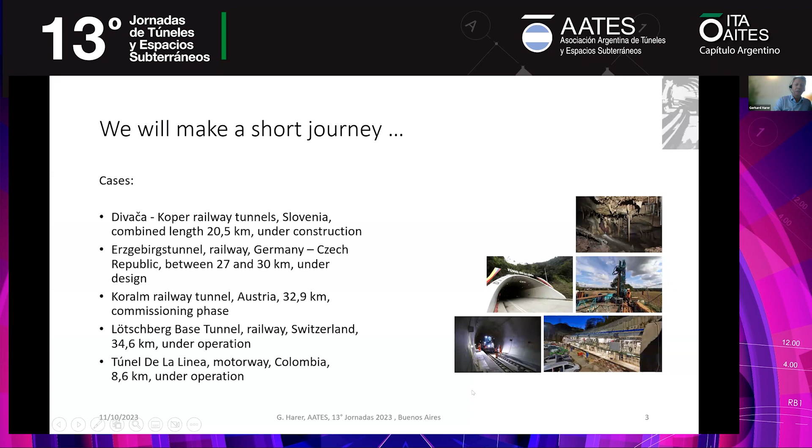Also, we will look at the colleagues in Switzerland, at the Lötschberg tunnel, a big tunnel with almost 35 kilometers in length. And at least I found one nice example from your continent, from the colleagues in Colombia, the Túnel de la Línea, with almost 9 kilometers in length. So with this, I will give you some examples of what I meant.

So what is the importance of investigation in these projects, in the development of the projects, and what is the role for us engineering geologists or geotechnical engineers? We have the responsibility to assess the ground conditions, and that's very essential, to provide material properties representing the conditions as natural as possible.

Of course, all these projects are fraught with some uncertainties, with some unsteadiness. You all know examples. It's because of political reasons, problems in design, different interpretation of facts, unsteadiness in financing, and so on, which can cause interruptions, delays, which extend the process of the development of the project, which also lead to changes in the project.

And usually we also have to consider that the larger the projects become, which normally is the case with huge base tunnels, the greater the uncertainties become. This we as geologists, engineering geologists, geotechnical engineers have to deal with in our approach to proper site investigation. Another very important aspect is the consideration of risk.

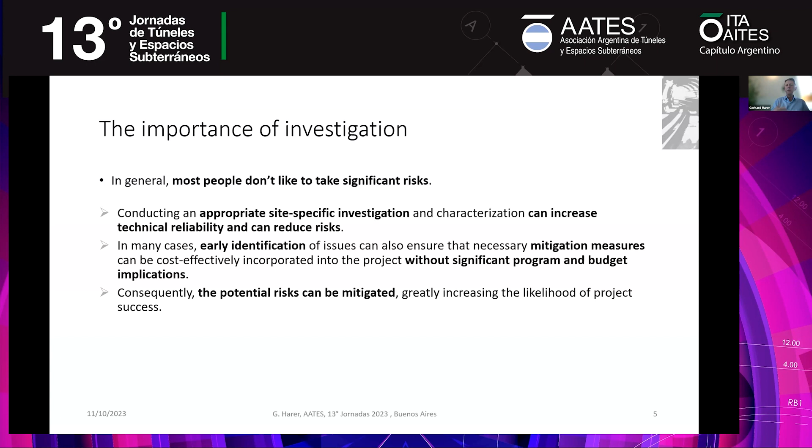The earlier we talk about these measures, the less their influence on the program and the budget of the project. And consequently, the potential risks can be mitigated, they have to be mitigated. And of course, if we mitigate the risk, this greatly increases the likelihood of our project's success.

What is the basis? And that's really my deep personal opinion. The basis for any proper site investigation is the development of an engineering geological model. Of course, in early phases, very coarse, very raw, and then step by step getting finer, having more results, having more data. But anyway, we have to form an engineering geological model, and all our investigation data shall be merged in this model.

And this model, of course, shall include all project relevant properties. So not all properties, but all project relevant properties of the soil and the rock and the groundwater. Of course, the micro and the macro structure, the dimension and the orientation of stresses, in particular in case of deep-lying tunnels, and the distribution of these properties in the project-relevant environment.

If we have a geological and engineering geological model, this enables us to have a three-dimensional understanding, which is important in particular in complex situations. And these models also allow us to communicate these complex informations to other stakeholders of the project. As I said before, these models are not static. They must be continuously evaluated and updated throughout the entire course of the project, from the early phases of design to the end of construction.

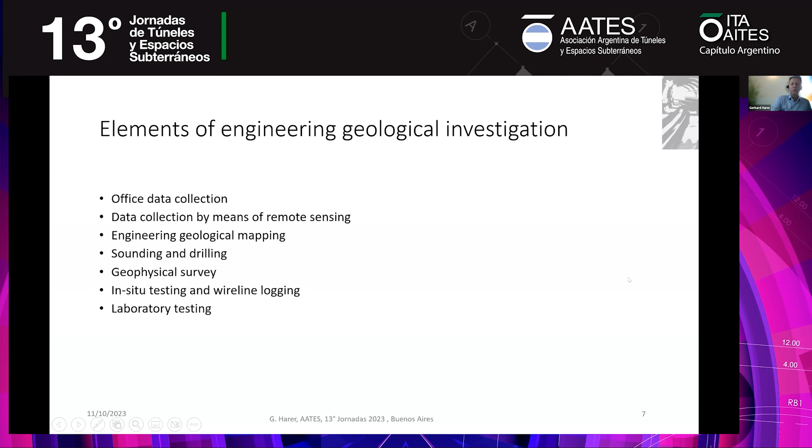We should not forget engineering geological mapping. I will talk a bit later about all these possibilities provided from sounding and drilling in combination with geophysical survey, also in combination with in situ testing and wireline logging, and of course also the testing of our samples in the laboratory. So our advantage is we have a comprehensively filled toolbox. This is available for us, and these tools shall be used for site investigation.

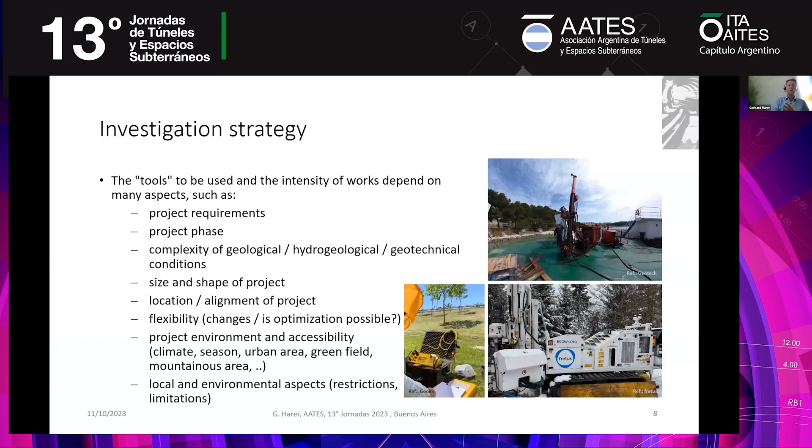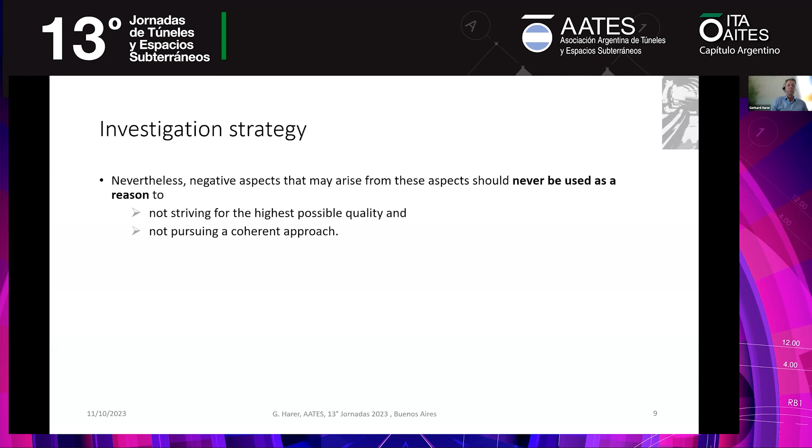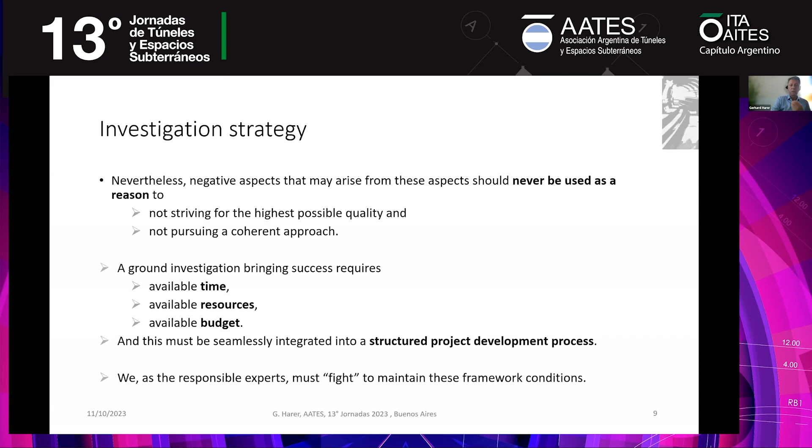So there are a lot of aspects which shall be considered, which can influence our investigation and our decision of tools. But finally, all these negative effects should never be used as a reason for not striving for the highest possible quality and not pursuing a coherent approach. This is our responsibility as engineering geologists and geotechnical engineers. But what we need for this is time, resources, and budgets. And all these must be seamlessly integrated in a structured project development process. And we, as the geologists, as the engineers, have to fight to gain this. It's our responsibility.

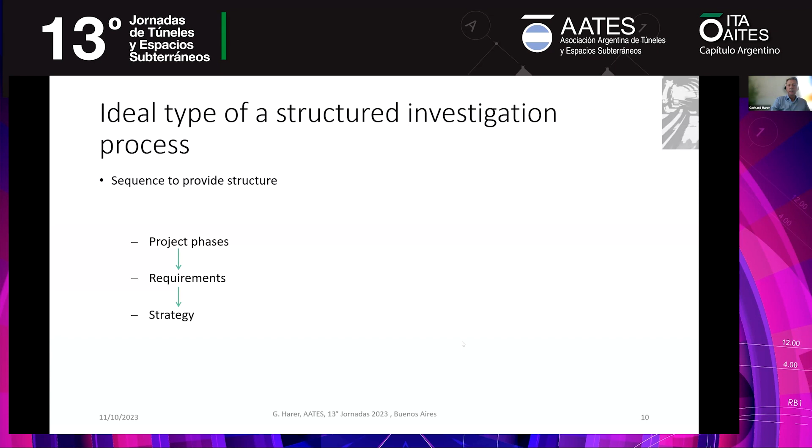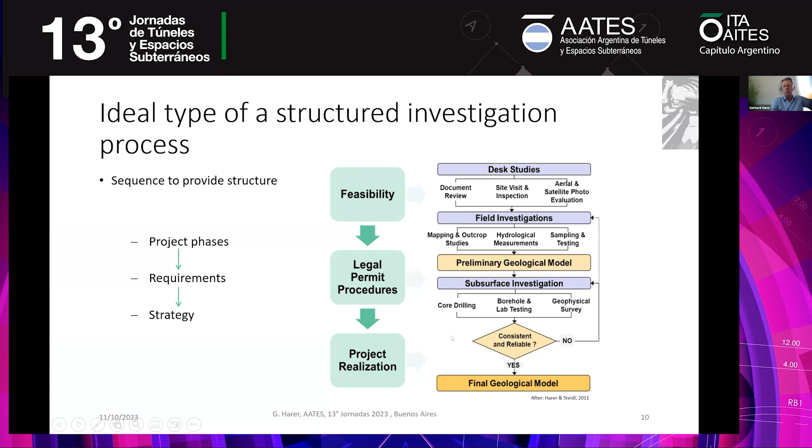Only on the basis of this model should you make the first steps for subsurface investigation. You should not drill, you should not do any subsurface investigation without having at least a general idea about the three-dimensional conditions of the ground to be investigated. And of course, by making this subsurface investigation, you get more information and you see whether your geological model is reliable or not. If not, you have to go again through this loop and reconsider it. And this can go on in several loops from project phase to project phase, from coarse to fine. And I will give you some examples about this.

One example is from my former projects, the Koralm Tunnel in Austria. We had pretty good success due to a structured investigation process. I'll give you some more data on the tunnel. It is an almost 33 kilometer long base tunnel in the south of Austria. At the portal sections, we have Neogene, geologically young sediments, and in the base, as you see in the right upper picture, we have very nice crystalline rock mass, but cut by huge fault zones and also covered with a deep-reaching weathering cover.

The overburden reached up to almost 1,200 meters, and we started with the first steps of investigation, data collection, aerial pictures and so on in 1998. And the opening of the project will be in 2025. So we are talking about a period of 25 or more years.

And if you do not have a structured approach to your investigation over this whole period, you will lose a lot of data. You will not really find this red line. So this structure of an investigation for this long-term project is really important and mandatory. So the site investigation for the Koralm Tunnel was composed, as I said, of satellite and aerial data interpretation, and of course also gathering all the office data.

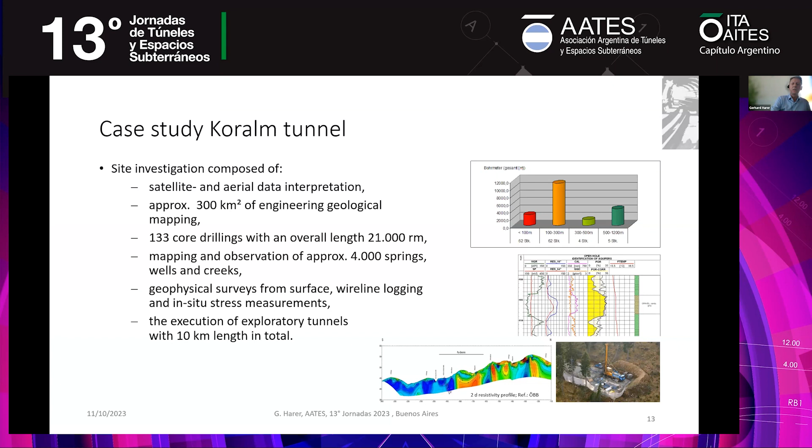We did wireline logging. We made in situ stress measurements. And because of this specific situation with these young sediments at the portals, we also carried out a system of investigation or exploratory tunnels from both portals. Carried out over a period of some 15 to almost 20 years during construction, but the project phase was more than 25 years.

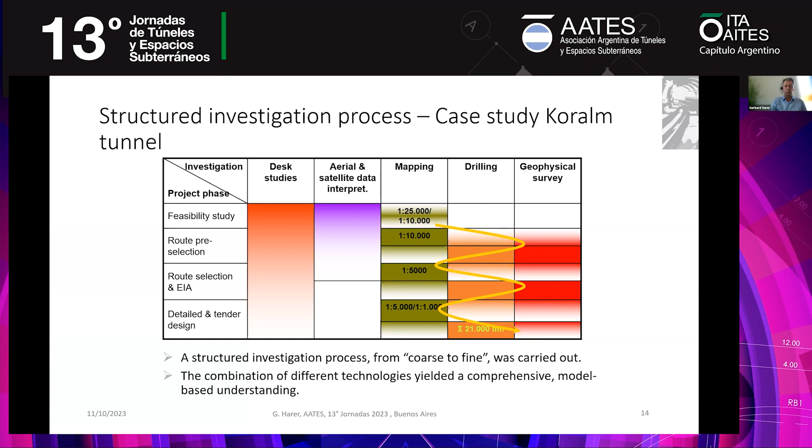So in this way, starting from a very rough approach in early phases to a stepwise detailed process, the more advanced the project is. So this structured investigation process, as I said at the beginning, was carried out with big success, always with the target from coarse to fine, and gained us really good success for this project.

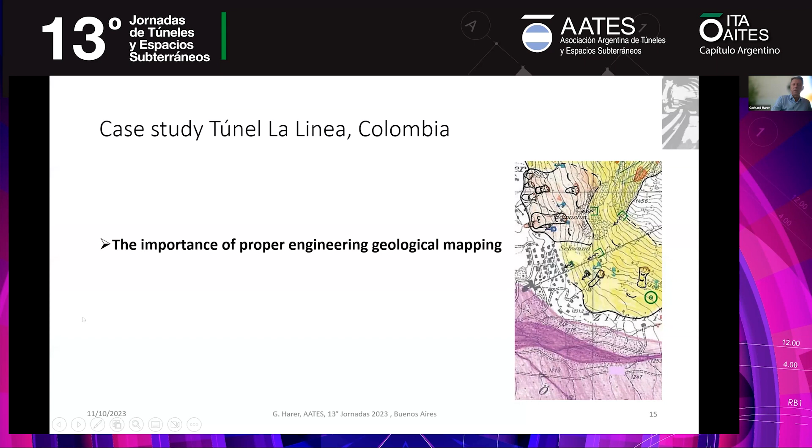One aspect where from time to time I see some deficits in the approach is the performance of engineering geological mapping. From my point of view, it's very important, and I do not know why it's not generally carried out in a really proper way. But what we should consider is that, of course, what to show on an engineering geological map depends largely on the project-specific requirements. So it differs a bit from this academic, pure geological way of mapping, what I called the conventional geological map.

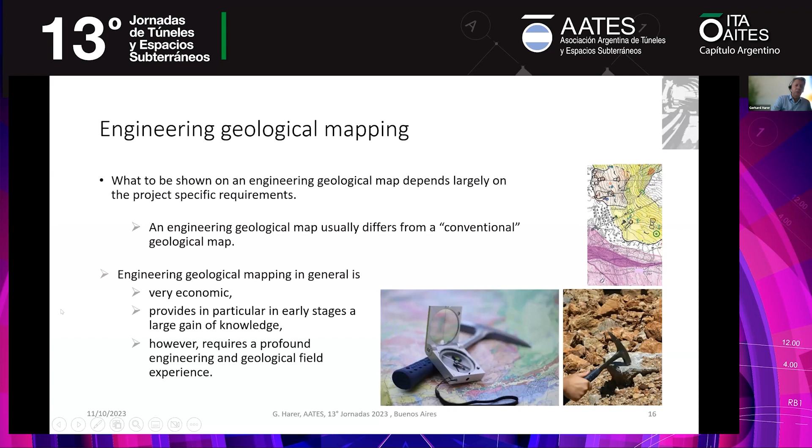What we should really find during this mapping are aspects which really have importance for our project. From my point of view, engineering geological mapping is very economic. It costs not much. It provides, in particular in early stages, a large gain of knowledge, but of course, it requires profound engineering and geological field experience. So you should work with really experienced consultants. But if you have these resources, at the end you will really win by this approach.

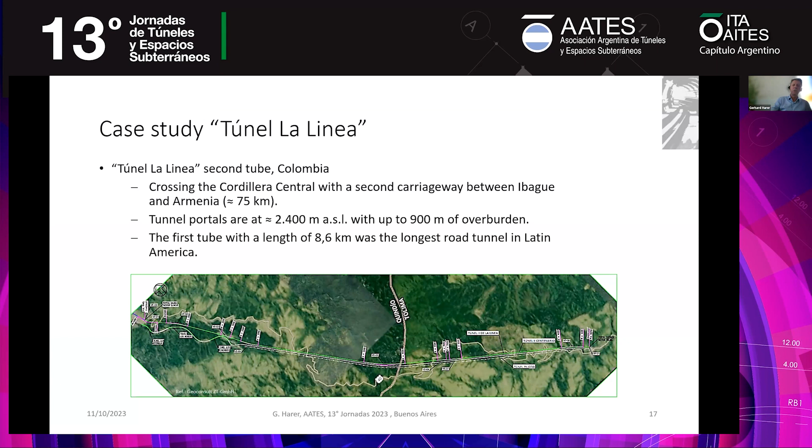Let us look from Buenos Aires a bit to the north to Colombia. I had the possibility also to join the Túnel de la Línea project. Probably most of you know this. With the first tube, it was the longest tunnel in Latin America, with almost 9 kilometers in length. The tunnel portals are at an altitude of roughly 2,400 meters above sea level, with an overburden of up to 900 meters. And the tunnel crosses the Cordillera Central. And the question was to construct a second tube, parallel to the first, for this motorway between Ibagué and Armenia.

The history of this project was not very successful, to be honest. For the second tube, several drillings were carried out by several consultants, also international ones. And you must consider the first tube was already existing. So there should have been mapping data from the first tube, but anyway, additional programs were carried out. In parallel, it was decided in 2004 to drill an exploratory tunnel parallel to the tube.

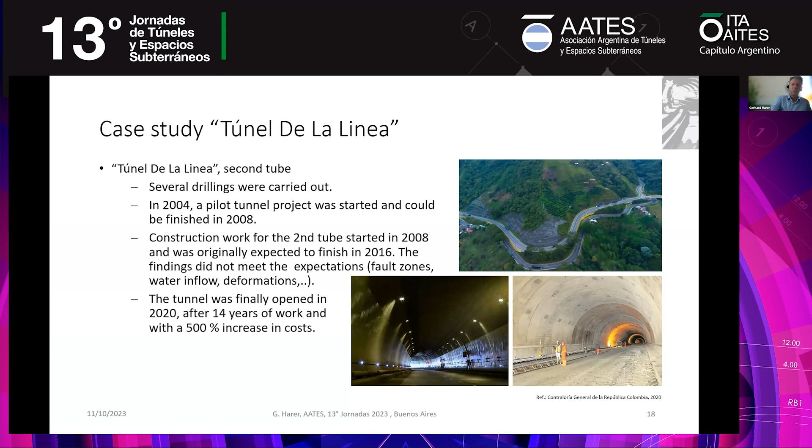The construction works started in 2004 and ended in 2008. With the findings of this, the client decided to start with the second tube in 2008, which was expected to be finished in 2016. During the excavation of the second tunnel, the findings did not meet the expectations. There were different fault zones, high water inflow, deformations, and the people on site could not explain why the situation was different from the expectations. Finally, after 14 years of work and with a 500% increase in costs, which means 5 times more, the second tube went into operation.

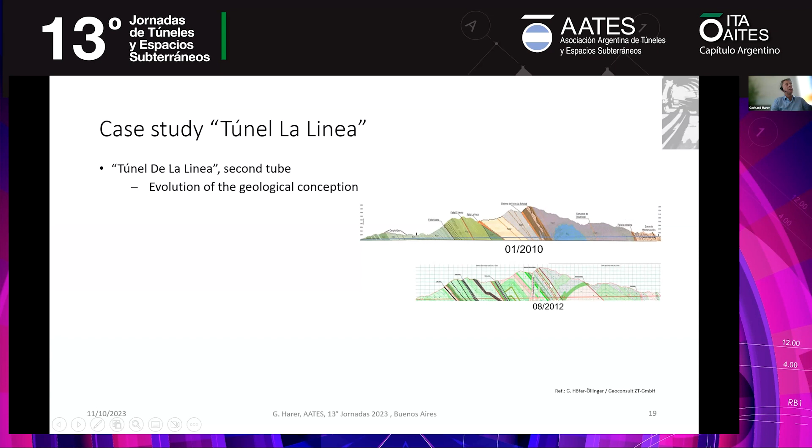You see, based on these data, on the non-existing data from the first tube, and without really sound mapping data, a longitudinal section was developed. You see, some 2 years later, same profile, same tunnel, the geological conditions looked pretty different. And some time later, they also looked pretty different.

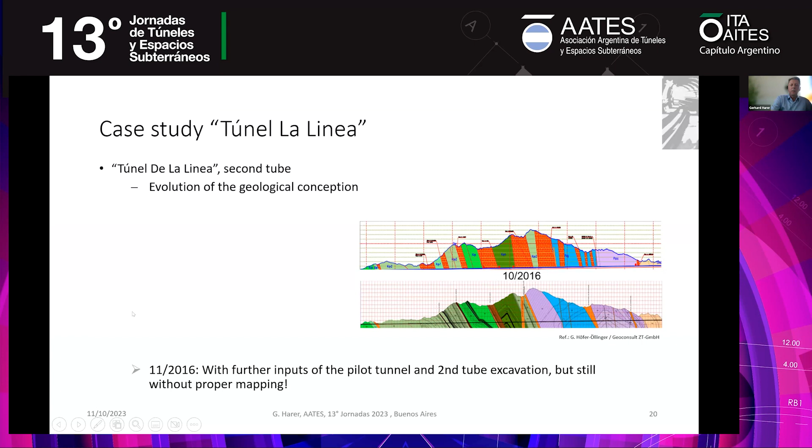5, 6 years later, it was simplified, but also a completely different picture, and so on. So also having these data from the pilot tunnel, having the data from the first tunnel, it was not possible for the colleagues really to prepare a sound and reliable longitudinal profile for this tunnel. So what we found out is that all these considerations were based on one surface mapping, which was carried out some 15 or 20 years ahead.

And we decided to go out, and within a few weeks we made a rough mapping. And you see also from this picture, the tectonic, the kinematic conditions from the existing idea and from our idea look completely different. And by having this data from surface in combination with the data from the pilot tunnel, here it's shown a bit better on the plan. So on the first, I showed you our mapping data. So it was possible really to develop a reliable longitudinal section. Then based on this, finally the construction of the tunnel could be finished on this reliable data.

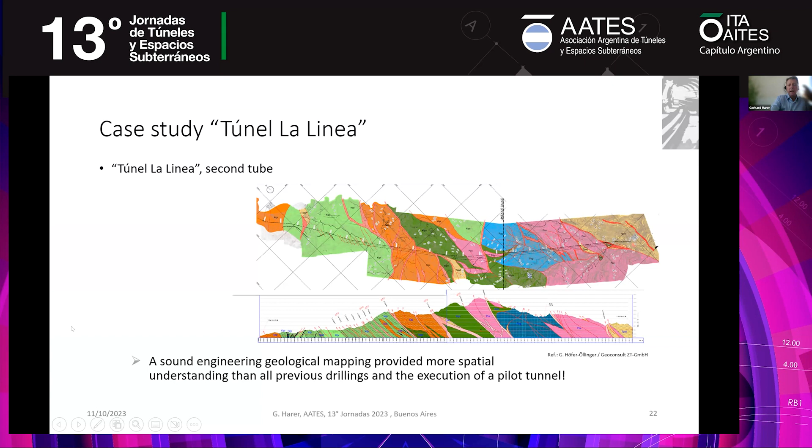So that means without having a sound geological idea also on surface, all these drillings and even the data from an investigation tunnel don't really help you to form a realistic picture of your geological conditions. What we should not forget and what we have to look for is really, if we apply subsurface investigation, we have to ask for state-of-the-art techniques and for high quality.

Here are some pictures again from the Koralm tunnel. I also told you in total we carried out around 21,000 running meters of core drillings with really impressive quality, with a core loss less than 5%, less than 3%. We continuously drilled with core diameters larger than 100 millimeters, even in depths to 1,100, 1,200 meters. The orientation of the drilling was no question, so we drilled in each and every direction: vertically, horizontal, upwards, deviated. So all these techniques are available and there are no limits.

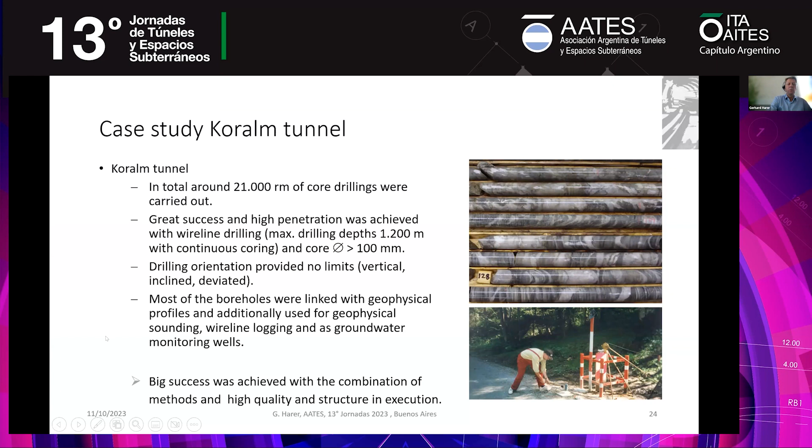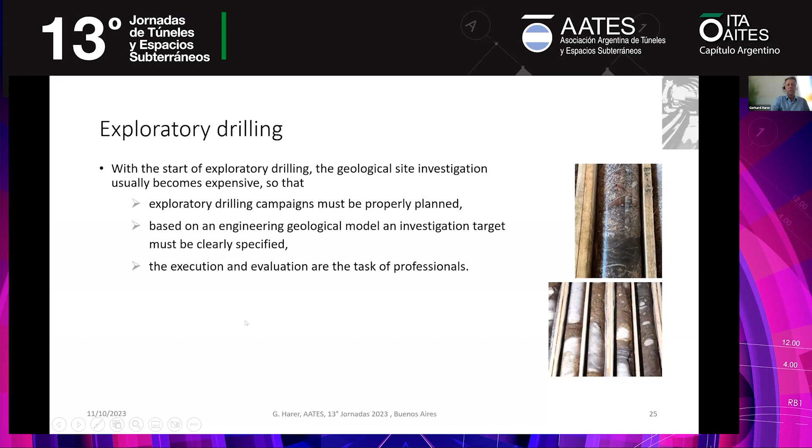And of course, most of the boreholes were then linked with geophysical profiles. And in almost all the boreholes, we made some observation wells. We did geophysical sounding, wireline logging, and so on. So that means our drill holes were used in a multi-purpose way. So with this approach, we had really good success for this Koralm tunnel. So to sum up, exploratory drilling campaigns must be properly planned, must be based on a geological engineering model with a clear investigation target for each drilling, and the execution, similar to engineering site investigation, is a task of professionals.

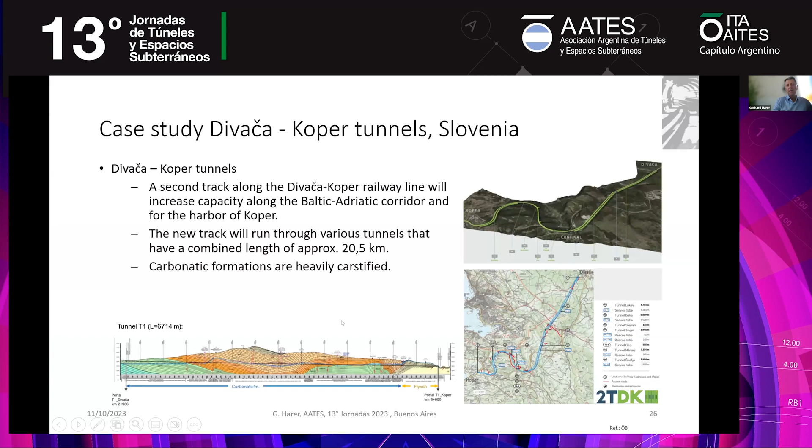I give you a very actual, very nice example now from Divača Koper in Slovenia. They have very difficult situations crossing a karstic environment. So it is a series of tunnels going here to the harbor of Koper with more than 20 kilometers of tunnel length in total, heavily karstified, and of course it's risky. And so the colleagues there developed a very nice approach of risk mitigation, of risk reduction in these conditions where karstic features are not regularly possible to predict.

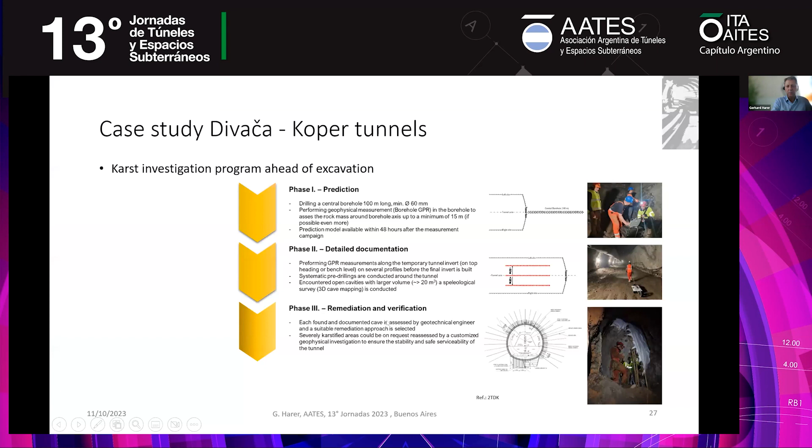So their first phase is to drill ahead of the excavation, really to see, is there a karstic feature, is there a cavity which can be dangerous or risky for the excavation. If they overcome this part, then they make a detailed documentation with ground penetrating radar, also to see for the final structure, are there any negative karstic features, any cavities around the tunnel, which probably later on can negatively influence the operation. And then in case they found something, also outside the tunnel, they do some measures to fill, for instance, these karstic cavities with concrete or whatever.

So a very nice example here you see from this first step. There were some indications there could be a cavity, and then after crossing this situation, they made this ground penetrating radar, and they see, okay, 4 meters below the tunnel floor there's a big cavity, which then, of course, was grouted.

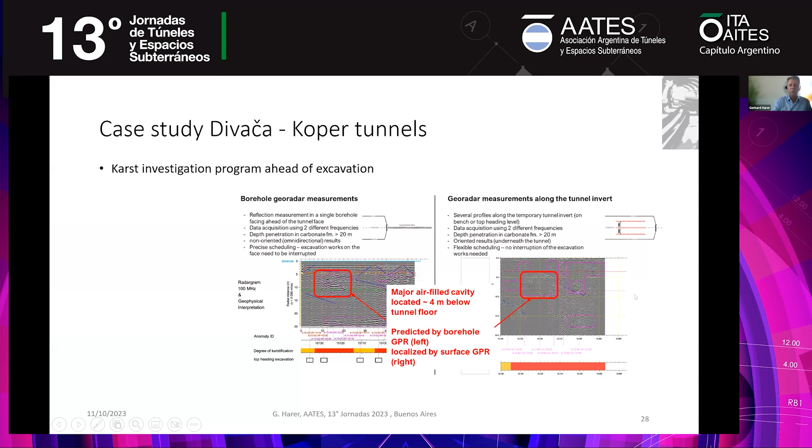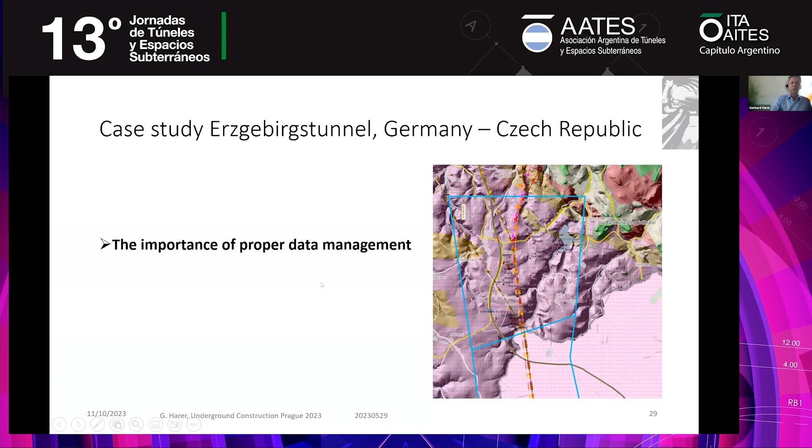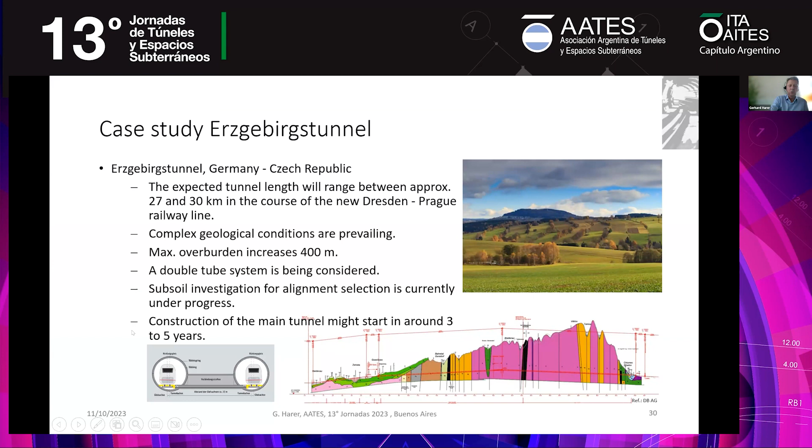With investigation, of course, we collect a huge amount of data, and it's also highly important to have a proper data management. I give you now a final example of the Erzgebirgstunnel between Germany and the Czech Republic. Also a huge tunnel, maximum overburden not so high, but will reach some 400 meters. It's this typical double tube system for high-speed trains in Europe. And at the moment the design process and investigation process is ongoing, and we expect to start in around 3 to 5 years.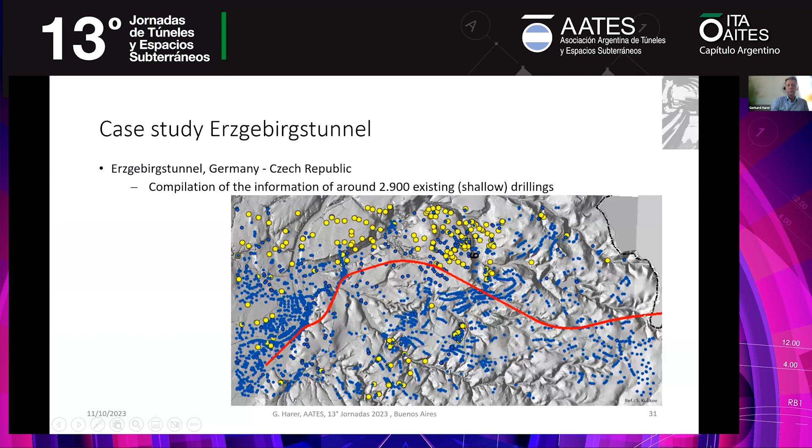What's interesting here is that you see from former times there are a lot of available data. As I said, Erzgebirge in German means ore mountain. So starting from the medieval age, there was a lot of mining work, and that's why there are a lot of drill holes, and still this information is existing: around 2,900, almost 3,000 existing shallow drillings. All these were put into this data management system, were compiled in this system, and the colleagues there can really properly work in this system.

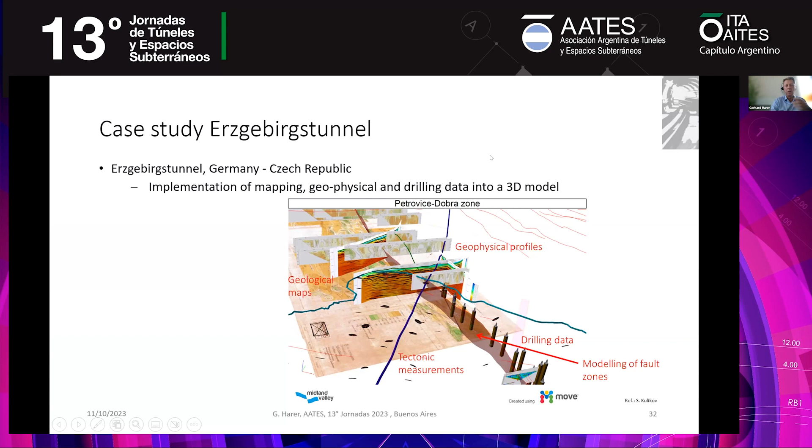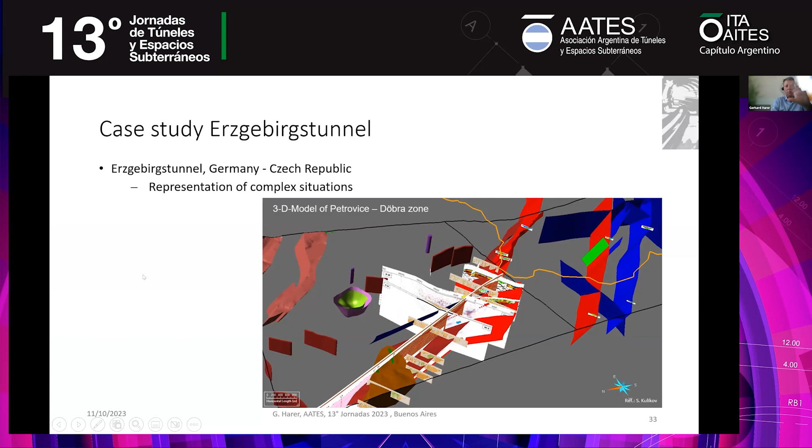They can do some modeling. They can show all the specific data. And they combine mapping with geophysical data, with drilling data. All is compiled in this three-dimensional model. So you can work out some specific images for complex situations. I will not go into detail, but anyway, at least to give you an image of what is possible.

So proper data management, from my point of view, is mandatory, and it provides various benefits. You can combine data from different topics. You can comfortably zoom in and out. You can decide about the degree of detail. You can overlay data. You can do some modeling and interpretation, which in particular in the future will be highly supported by these developments in artificial intelligence, which will really be a task of the next decade.

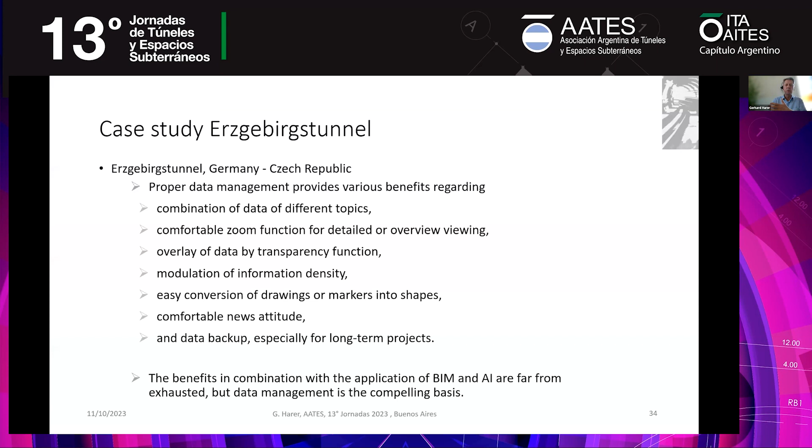It's easy also for communication, so it provides you a lot of benefits, but this idea must start at the very beginning of a project and of an investigation program.

So you could say to me, just 2 or 3 minutes. Is everything okay? Yes, everything okay. Now, I come to my last slide.

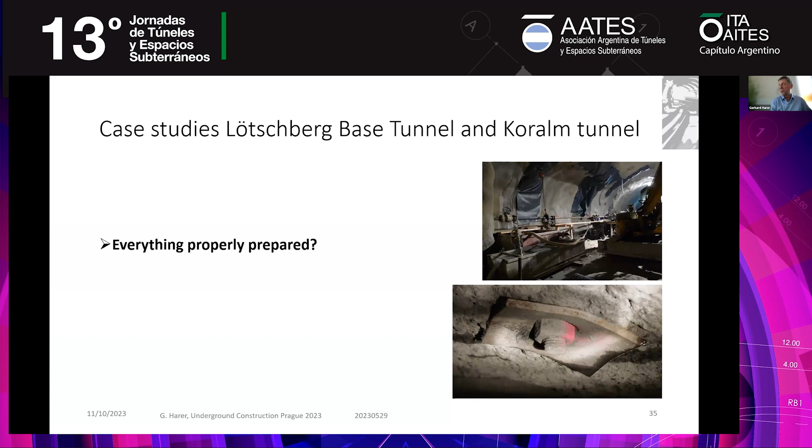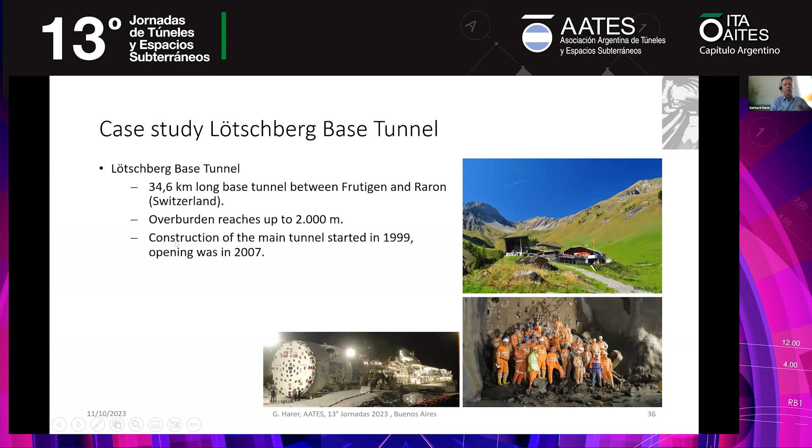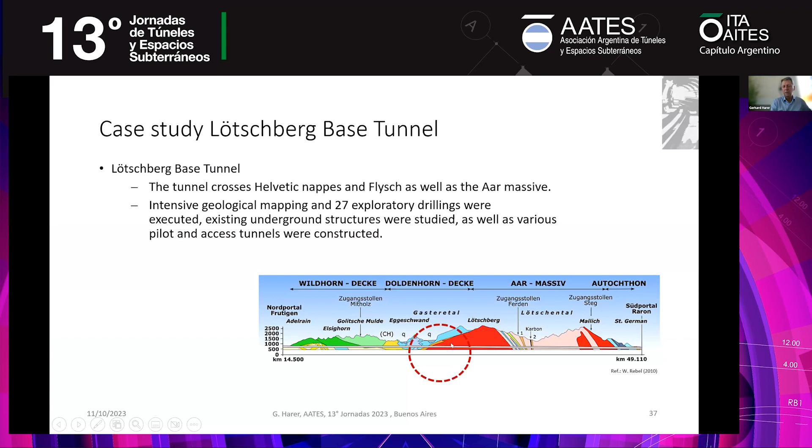So we know a lot, but not everything. I give you only these 2 examples, from the Lötschberg tunnel some 15 years ago. A long base tunnel in Switzerland, crossing the Western Alps. Let us have a look at this detail. It was expected to have these conditions, but there were some approaches that said, okay, probably a carboniferous syncline could also meet the tunnel alignment, but it was decided no, it will not happen. Sorry to say, shit happens. So at the end it happened. You see the results: long-term deformations, more than 1 meter of deformation, problems in tunnel support and so on, with of course huge extension of construction time and costs.

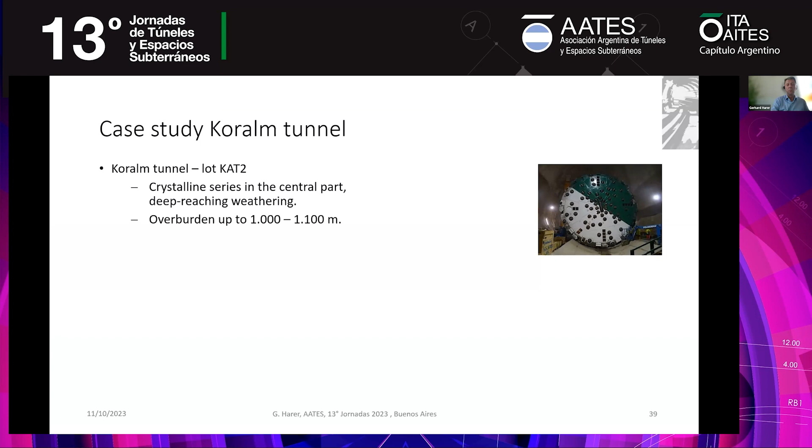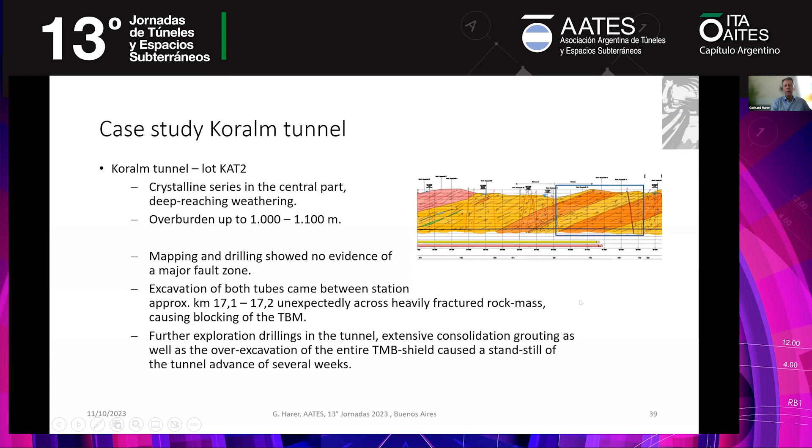Also in the Koralm tunnel we had problems, although we did really good investigation. The overburden in this case is roughly 1,000 to 1,100 meters. We said from the mapping and from the drilling, okay, this fault zone will have this direction, but at the end it turned here and we met this fault zone here. We encountered this fault zone with both TBMs. We had overbreaks in this way. We did some drillings. We had a collapse also for the second TBM. At the end, we had standstills of several weeks, and of course a lot of further investments to keep the TBMs running. So what we have to consider: we have the responsibility and we have the tools.

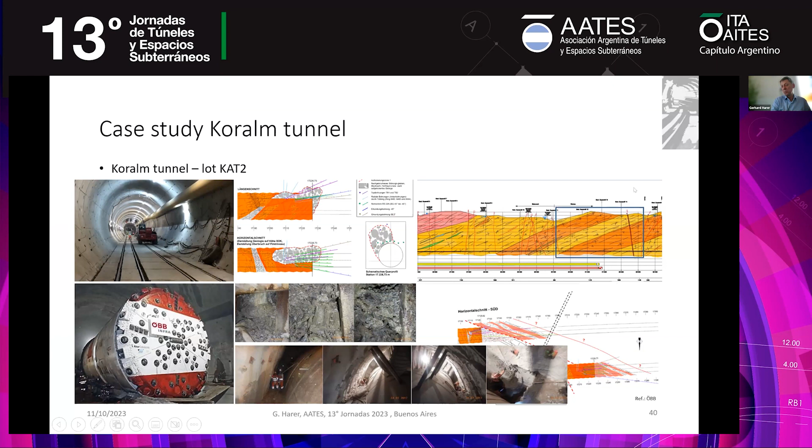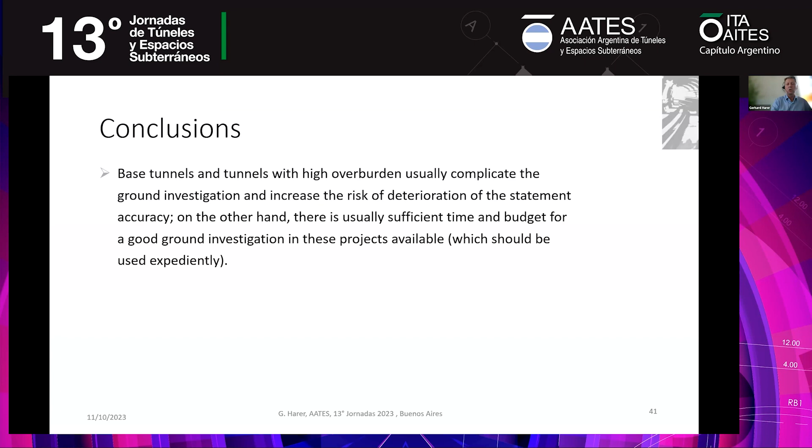Here you see the results. Here you see how it could look if you have to excavate the machine which is clogged. So having all this knowledge, having all these tools, there are still some situations where we have to consider that we cannot solve everything. Base tunnels and tunnels with higher overburden usually complicate the ground investigation. That's quite clear because of overburden and several other aspects. They increase the risks, but on the other hand, we have a big advantage. Normally, we have sufficient time and budget for a good ground investigation, in particular in these projects.

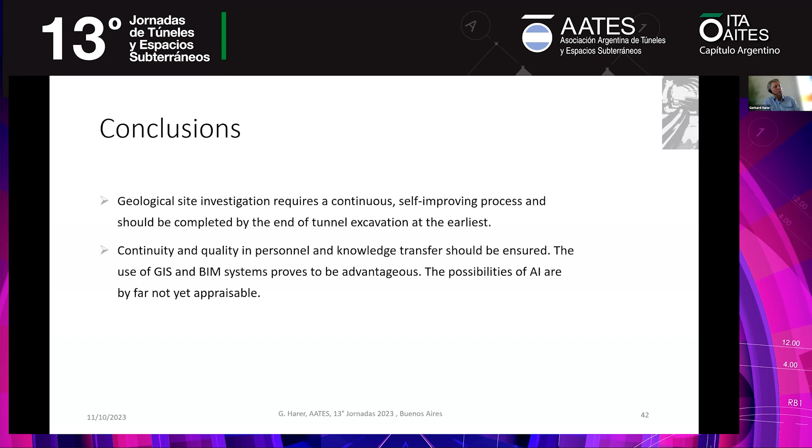A professional, quality-driven engineering geological investigation requires a structured process, sufficient resources, and of course quality in planning and execution. That's quite clear. Geological site investigation requires a continuous, self-improving process, which should be complete not earlier than the end of the excavation. In the future, I'm quite sure we will have a lot more benefits by using these techniques of building information modeling and artificial intelligence.

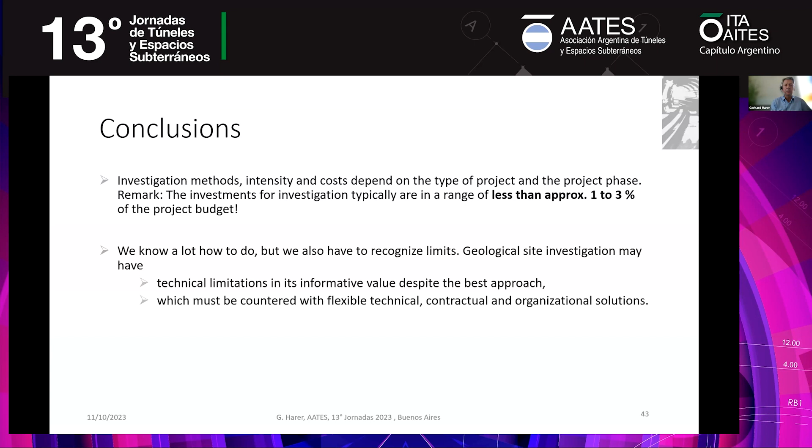Normally, we also know that investigation is really cost effective. In all these projects, the cost of investigation is in a range of less than 1 to 3% of the entire project budget. So also from the economic point of view, there is no reason why we should not carry out really proper investigation. But at the end, we know a lot, but we also have to recognize that we have our limits. Despite this recognition, we have to look for the best approach. This is our responsibility, and this remaining risk has to be countered with a flexible contractual and organizational solution, at least during construction.

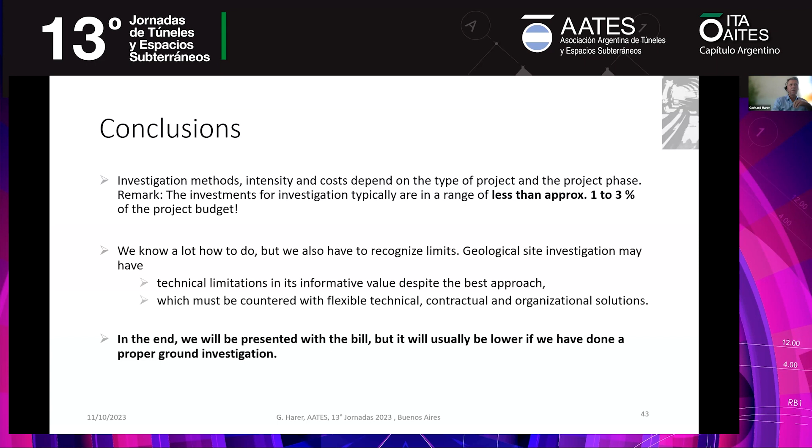And at the end, the bill will be presented to us. Usually it will be lower if we have done a proper ground investigation.